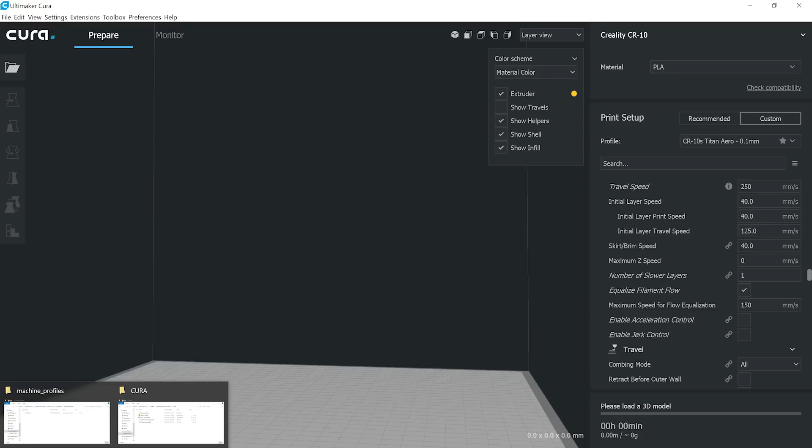Unfortunately, the ini file that they have is considered legacy, so it won't directly import into here. But we'll use it to kind of get the details of the printer as far as offsets and size and such. So running this application, it's in Chinese. You'll want to hit this button here, and then it will go through the install process. And in this case, I've already installed it, so it's asking me, do I want to overwrite those files, yes or no?

So it installs to Program Files x86 if you're on a 64-bit machine. Otherwise, this would just be Program Files. Cura 15.04.6, Resources, Machine Profiles. And inside here, we have an ini file. If we open it up, we can see the machine properties. And then there's a bunch of profile properties here.

So I'll steal some of these options here. We can see that the width is 310 by 310. 405 millimeters high. We're not using 0 in the center of the bed. We're using it in the front left corner, which is kind of normal.

We're using Marlin. We have 2 extruders, and it says that the offsets are 0 and 0 because it's actually one hot end, one nozzle, instead of dual nozzles side by side where they would be offset from each other. And then this stuff is just kind of the printing profile options. So we'll steal some of these values. Let's go back to Cura.

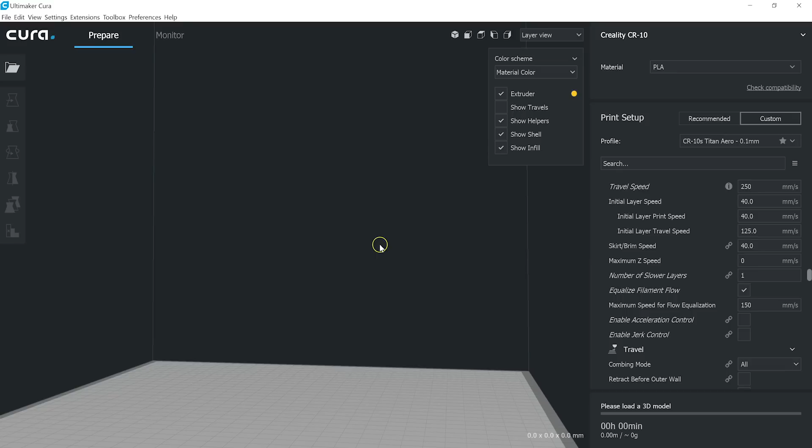Back in Cura, we're going to add a new printer. Go to Settings, Printer, Add Printer. Normally I'd choose something like a CR-10 to give us a good starting point, but that locks us down to only having one extruder. So we're going to choose Custom. And we'll go entirely custom, and I'll call this New CR-X. Hit Add Printer. And wait for that to be reflected up here. There we go.

So this is where we're going to steal some of those properties from the ini file. So we can see that we're using Marlin, which is already selected. We have a rectangular bed. In this case, it says 310 by 310 by 405. Machine center is 0 is false, so that's not checked, that's normal. We have a heated bed, and we have 2 extruders. 2.

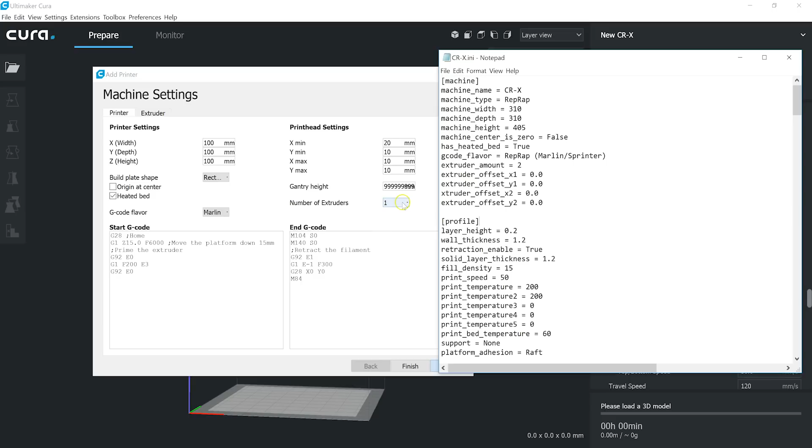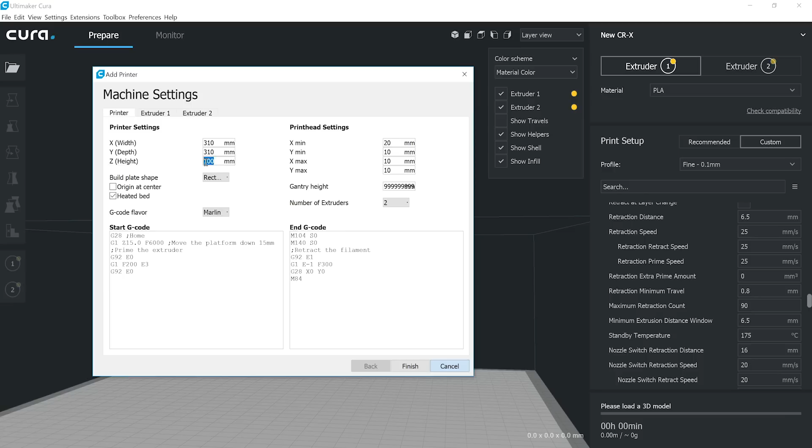So I will choose to change these to 310 by 310 by 405. 310. In the background, you can actually see it reflecting the changes. It's a little bit laggy. There we go. That's 405. Okay.

For now, I'm going to leave these values. I've changed it to 2 extruders. I'm going to change the start and end G code. I'm stealing this from my CR-10 profile. And this is now appropriate.

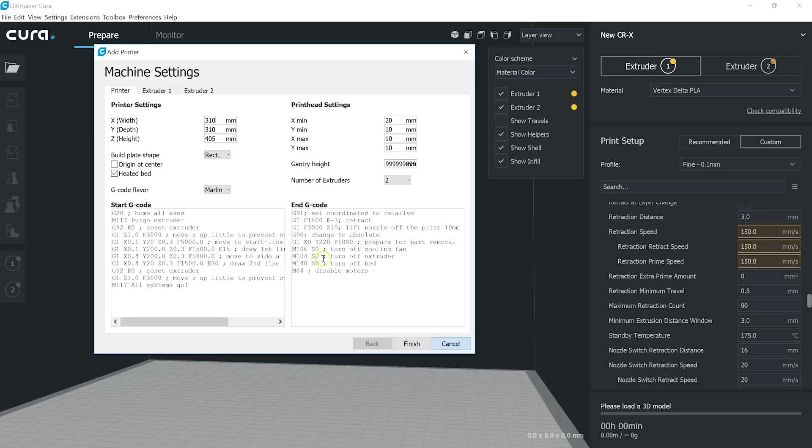And so let's go to the extruders tab. So we see when I change that to 2, there's now 2 tabs up here. So extruder 1 is a 0.4 millimeter nozzle, 1.75. And extruder 2 is the exact same. They're coming out of the same nozzle. I'm not going to put any start and end G code in these for now. With that set, let's hit finish.

So now up here, you can see that I have extruder 1 and 2, just so that we can see them reflected in the slice. We'll just change these colors so that they're not both orange. I'm just going to choose another material here. Oops. There we go.

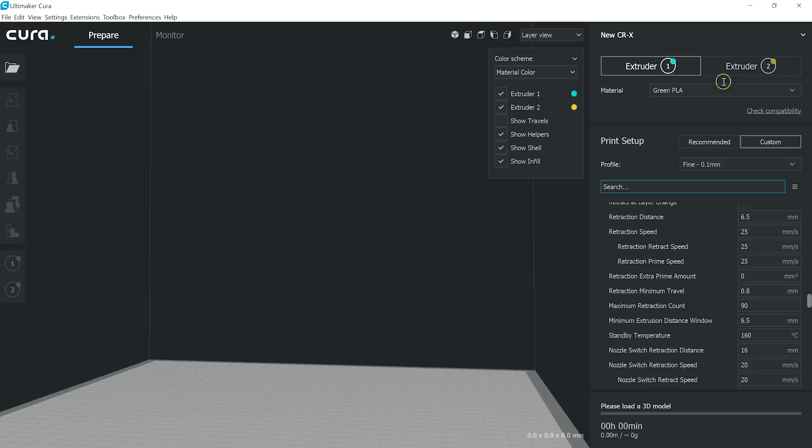And one of these other PLAs. Here, green. Okay. I'm going to use a profile that I already have set up for a CR10. This is for a Titan Aero, so I'll want to change the retraction here. We'll do 7 or 8 millimeters.

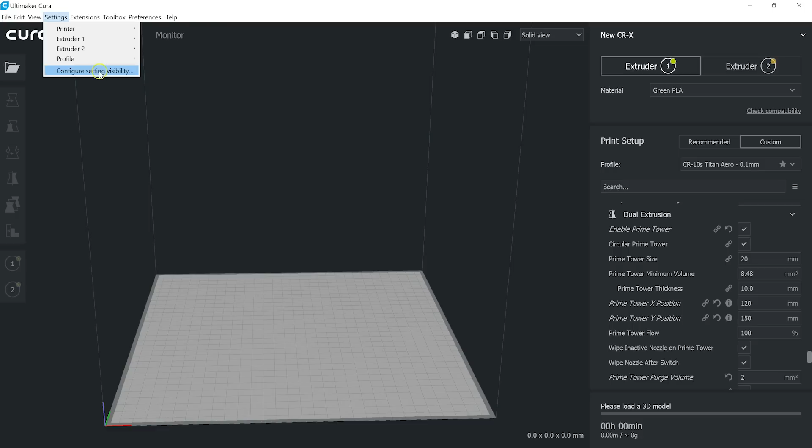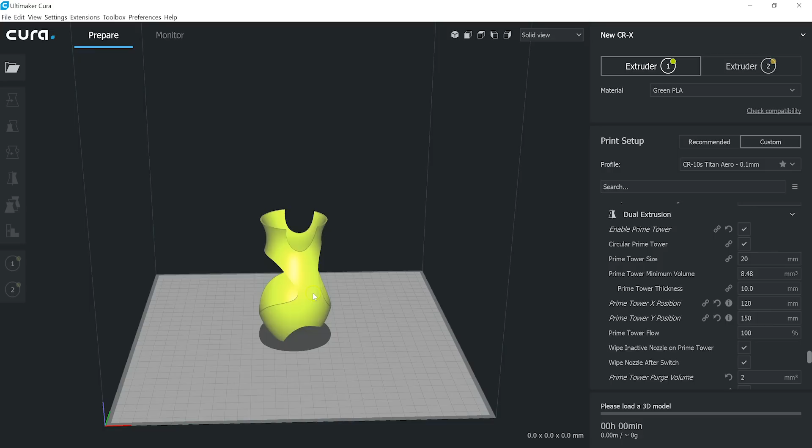7.0. There's a section now, because we have dual extrusion, there's a section called that. Make sure that you can view that. You may have to configure your setting visibility to expose these options. I'll import a couple STLs just so that we can see where the prime tower is. So if we open this, I'll go to the USB key here. We'll have a link to these 2 STLs in the description, I mean.

Move them around. Okay. So the prime tower, this tells you where on the bed the prime tower is going to be. I've just chosen some arbitrary values. We can move it later. We want to make sure that it's enabled. In my case, I've chosen a circle. We're going to wipe after the nozzle switch.

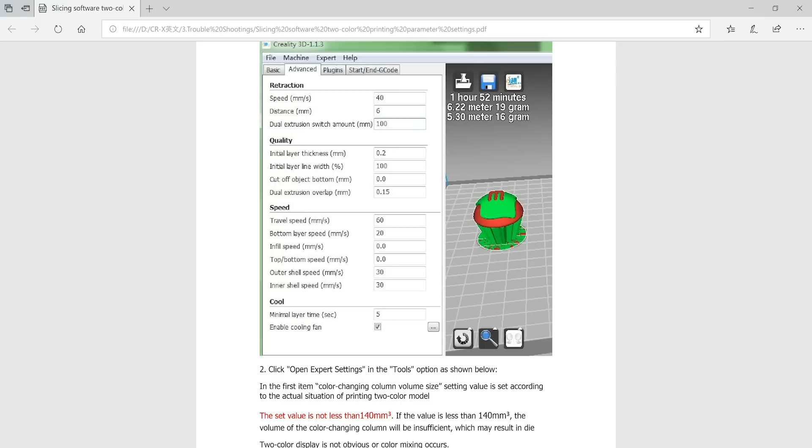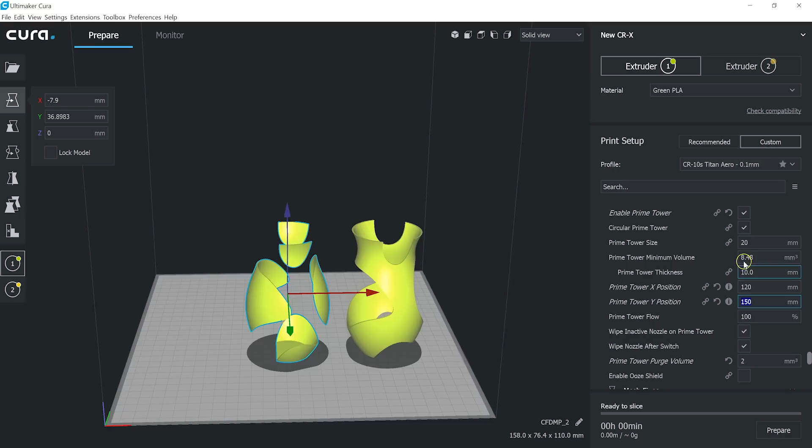And the purge volume. So this purge volume here, I believe this is specified in here. So they say the color changing column volume size setting, set it to no less than 140 millimeters cubed. So color setting. There. So that's this value here. It's set extremely small. So this is the value they're asking us to set it to no less than 140 millimeters cubed.

We also want to go and set the retract. So this no less than 100 millimeters, they call it double nozzle switching retreat. That's under the material options. Nozzle switch retraction distance. So they've said 100 millimeters, that's what it's set to, and it's set to 40 millimeters a second, which matches their documentation here.

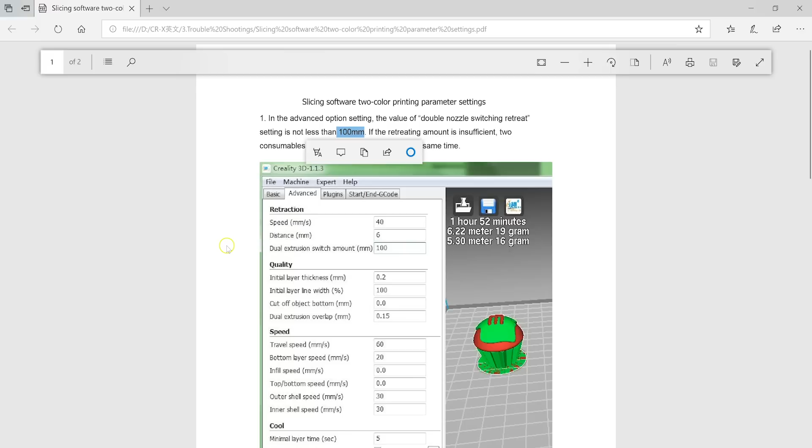Now they say their normal retraction, they want to use 6, I've set it to 8. 0.2 millimeter layers, travel speed of 60, they say 20 millimeters a second for my bottom layer. I'm going to use my kind of standard CR10 speeds. Outer shell speeds, minimum layer time, and cooling fan. So that's all kind of normal stuff.

So as you see, I've inserted an STL. The way you need to do dual color is to have an STL carved up into 2 new STLs. And then we'll merge them together. So we'll want to choose which extruder is going to print each of these. So right now we can see they're both green. They're both going to be printed by extruder number 1.

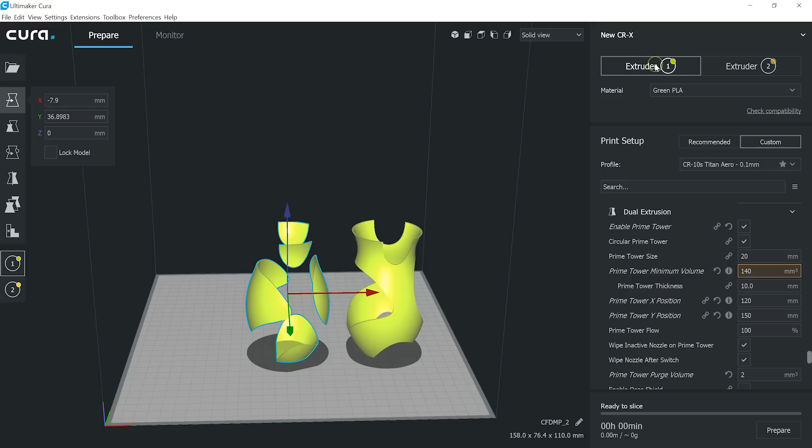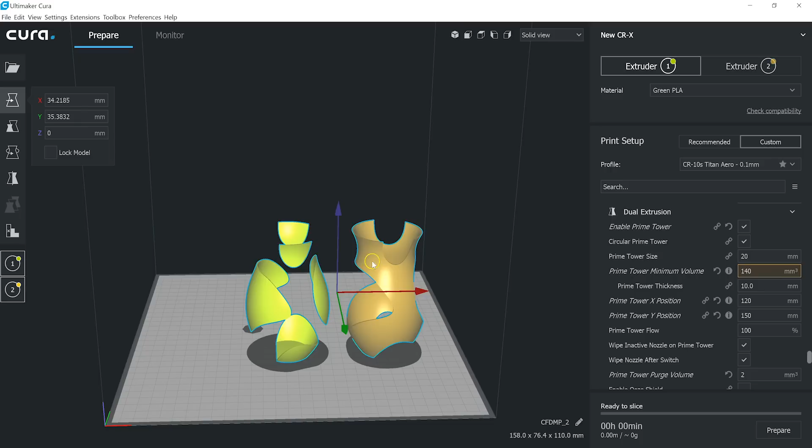So for this section, I want this to be printed in extruder number 2's color. So I'll choose to print that model in extruder number 2, and it changes color to reflect that. And then I want to merge the 2 of these into 1. So if you highlight them both by holding down Shift and clicking on both, I will merge the models. There we go. So now that's what the end result is going to look like, and this is where our purge block is going to be.

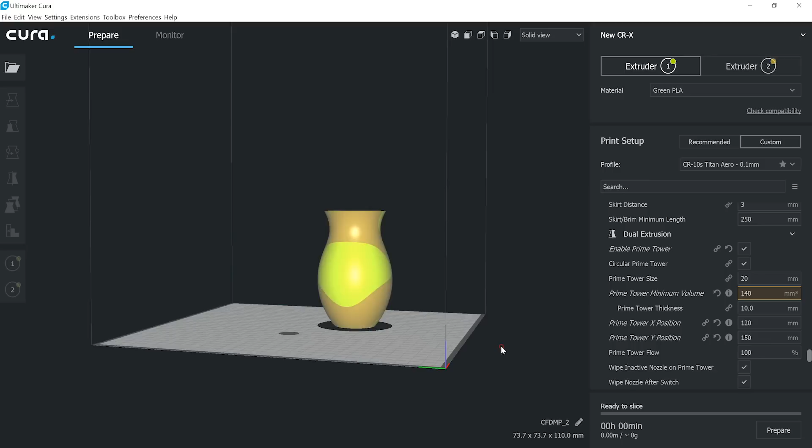I have a feeling that 140 millimeters cubed of purge block is going to be more than enough, probably a little bit wasteful, but at least we won't have any color bleed as it switches from color to color. Some of these layers, as you can see, are going to switch color quite a few times. There's green over here, and then this other color, and then green again. There we go. We can see that in one layer there's technically 4 color changes. And each time it changes color, it needs to dump some plastic on that purge block.

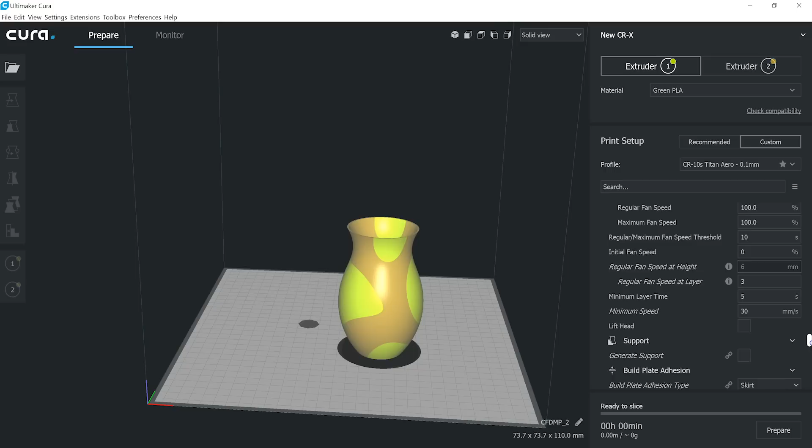So I'm going to do a skirt a few millimeters away from the item. I'm not generating any supports, and I'm not actually using a spiralized outer contour like you would with a normal vase. This is already hollowed out, and it's definitely thicker than a single extrusion width. I'm keeping my fan on. My fan's going to come on at layer 3.

Let's just quickly go over some of the other settings. I'm going 70 millimeters a second. For the bottom, I'm changing that to 35 or 50% the normal speed.

So this is my build plate temperature. 60 is probably a little bit on the hot side. That's normally what I run on my CR10 with PEI. And for this material, I know it prints pretty well at 220. We're using neat filaments.

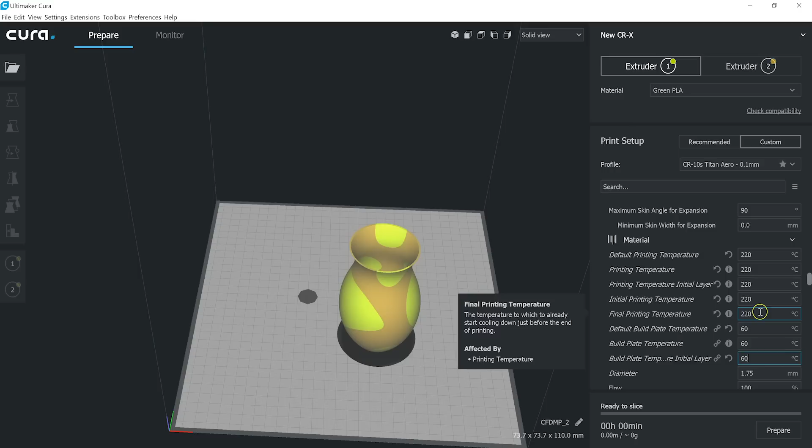The other thing is it's definitely easiest to keep both of the PLA brands or both of the materials the same. Otherwise it needs to heat up and cool down in between the different color changes. So just to make my life a little bit easier, I'm keeping those the same.

So we don't actually want to do any kind of infill here. We want to make this completely solid. So I've done 2 walls. I could just increase this number so that it's considered all walls. And we definitely want to allow thin walls. So there we go, print thin walls.

And if I just do a prepare, we can see a likely bogus estimate as to how long it's going to take.

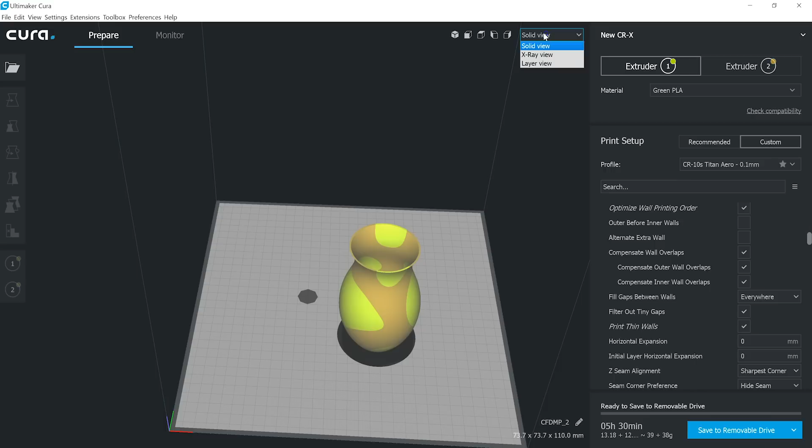If I go to layer view, we can see the very large purge block. So this is kind of a priming area. It's going to prime, and then it's going to purge out the remainder of the color as it switches.

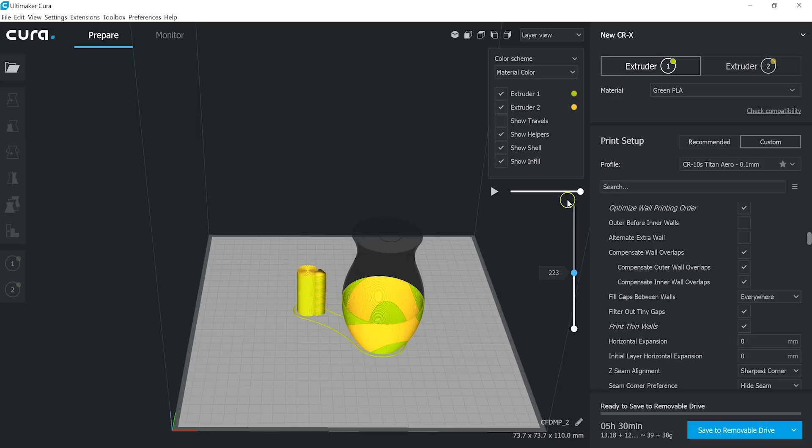And we can see, in some layers, as I was describing, there's green, then there's yellow here. So I'm curious if it'll do all the green and then switch to minimize the amount of color switches, or if it's going to just print one, switch the other again, and switch again. Hopefully it's efficient, we'll see what Cura does here. We could actually play and see what happens if we wanted to.

But I'll wait to see it for real. I don't think there's anything else here that we need to check. So I've got the infill set to 100% just in case those walls were not enough. We could just do your normal walls and 100% infill between them, but it's not very thick. So I think that's about it.

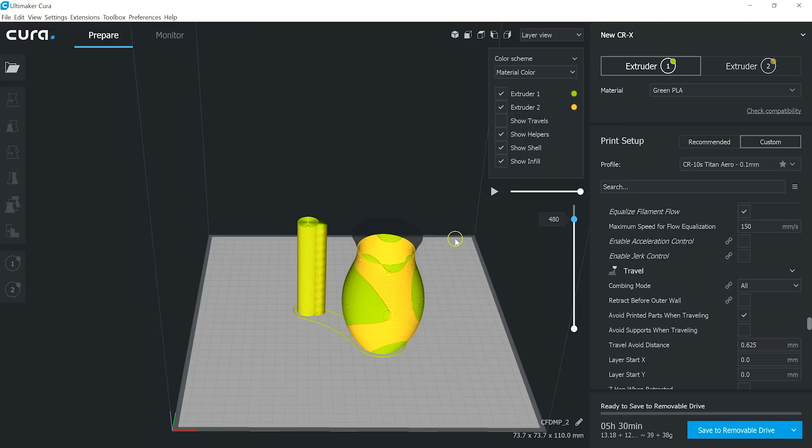We may want to Z-hop when it retracts. Otherwise I could see it stopping as it goes to do the color change, and when it does that long retraction to bring the filament up through the Y kind of splitter on the hot end, it'll sit there and maybe cook the surface.

So most of this isn't going to be super negatively impacted by Z-hops. If you have a lot of moving between parts, every time it retracts to move between parts, Z-hopping can sometimes cause stringing. So I'm going to look up Z-hop when retracted, and I believe they actually gave a recommendation for how high to Z-hop, so let's take a look.

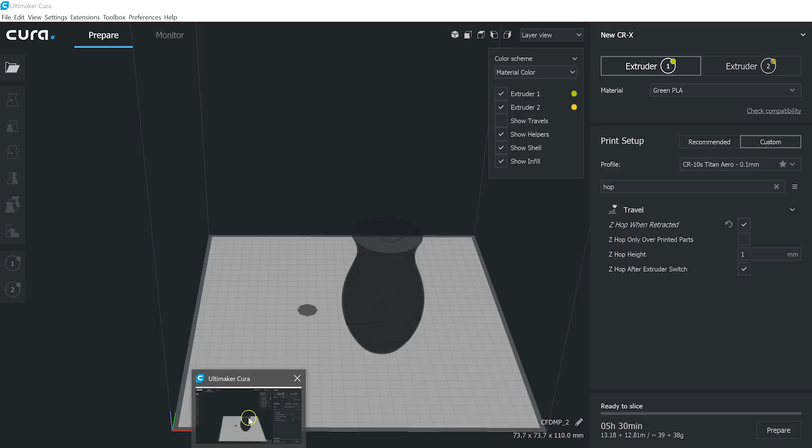I may opt to leave it off. Yeah, why not? And hopping after the extruder switch, and we're going to hop over printed parts.

Okay, so let's re-slice that. And let's just take a look at how the first layer is going to be printed.

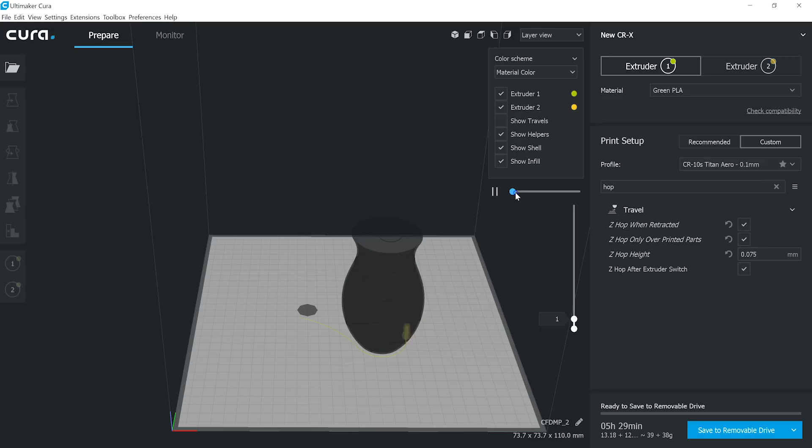So let's play layer 1. It starts by drawing the skirt that I asked it to do, a few millimeters away from the object. Let's fast forward this. And then it begins by printing extruder 1. And then it does the skirt and a purge.

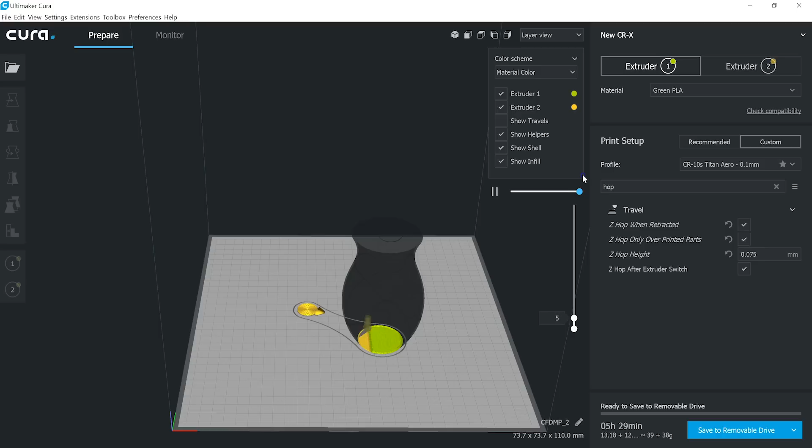Make sure that all the green is out. Switches color, and then does the other half of the base. So as we can see it go up—oh, we've lost our colors. There we go. As it goes up, you can see it does that over and over, purging, alternating green, yellow, green, yellow.

So let's save this to the drive and go to the printer.

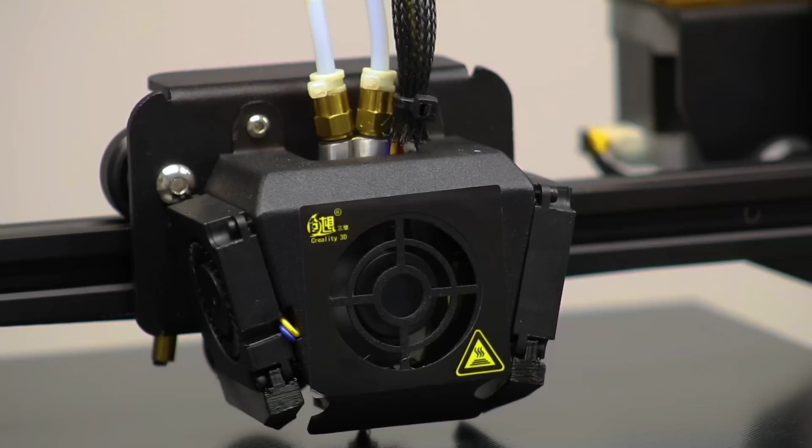If you're facing the front of the printer, the left extruder is extruder 1. In our case, we have yellow going in there, so that's the first one that's going to extrude. Let's feed that all the way in, right to the bottom. Then, in our case, red is extruder 2, and we'll feed that in just about 1.5 centimeters or so inside the collar.

It will handle the retracting and switching of those filaments with the 100 millimeter retraction distance.

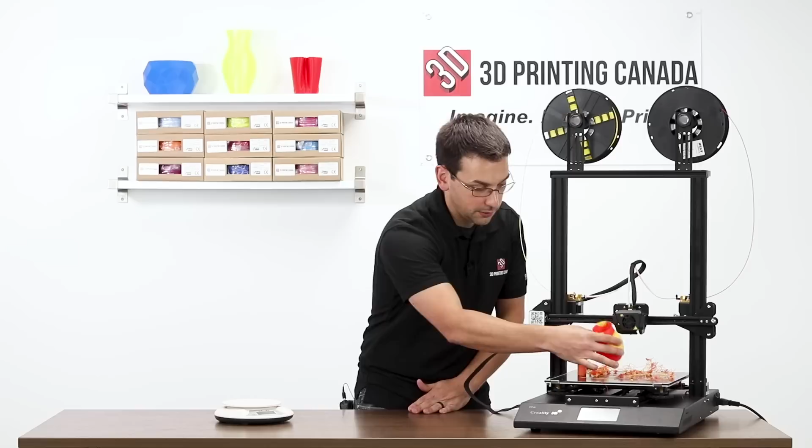Well, here we are a few days later, and as you can see, we have a masterpiece of sorts. We're a few days later, not because this print took a few days, but because this takes about 8 hours or so, and we tried 3 times to get this thing to print to completion. It almost seems as if the hot end is getting stuck on the purge block, and we end up with a pile of spaghetti. So we're going to have to go through the time-lapse video footage, get a feel for what's happening there.

But as for what it did produce, we definitely have some tuning to do. You can see little globs at kind of the start or end points of particular line segments here. This is kind of a complex model because there's multiple color changes within one layer, multiple start and stop points. We also have a little bit of bleeding of the red into the yellow.

That tells us that we need to do a little bit more purging, especially when we're trying to purge the red out of the hot end and replace it with yellow filament. We don't seem to have that problem as we go from yellow to red, probably because the red kind of overpowers that color. So there's definitely some improvements to be done, and obviously bed adhesion is kind of our biggest problem, if there's not some sort of mechanical reason why it's getting caught on this.

We've tried leveling it many times. We know leveling's not the issue. The layer laid it down perfectly flat and even.

In sample tests, it was very difficult to get the purge block even off the bed. I had to kind of hack at it with a scraper, trying not to damage the surface. And that was only after adding Elmer's Extreme glue stick to the print bed. Without anything added to the print bed, I couldn't get it to stick at 60, 65, 50 degrees.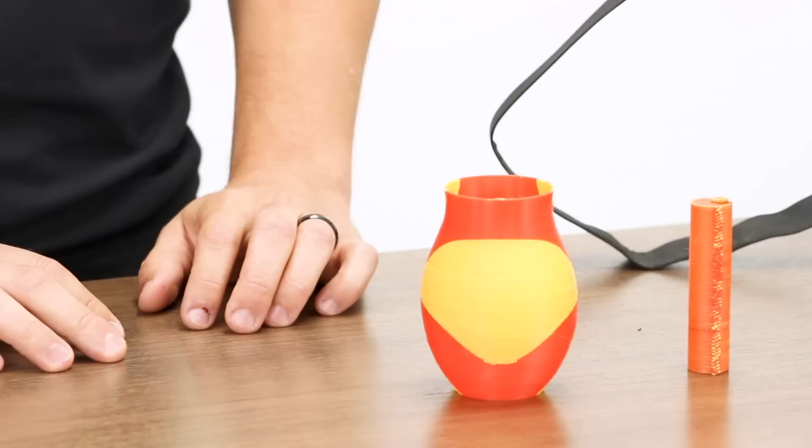We tried all kinds of different ranges, and we did many test prints, only a portion of the height, just to kind of test for good bed adhesion. It seemed to be fine on this last print with a good coating of glue stick, but something has still gone wrong. So we'll spend some time trying to get that to work, tune our retraction settings, maybe our start and stop or coast and wipe, and we'll get back to you with a future video.

One last thing that I noticed is, being that this is a largely hollow model with just a couple walls and zero infill, the purge block, because of the number of color changes in this model, is significantly heavier than the model itself. Although the model didn't fully complete, let's compare how much each weighs. So the model itself is 30 grams, and the purge block is 31 grams. It maybe just feels heavier because it's denser, being one solid chunk.

On the purge block, you can actually see that as we're purging the yellow out and replacing it with the red, we're purging way more than we need to. The yellow is kind of gone the moment it starts purging, and then we have a very large infill of red. We use the stock suggested amount of 140 cubic millimeters for the purge, so maybe we can pull that back a little bit. I'm not sure if we can adjust the purge for each individual color, add more when purging from red to yellow, and maybe save some when we go from yellow to red.

Hopefully you found that informative.